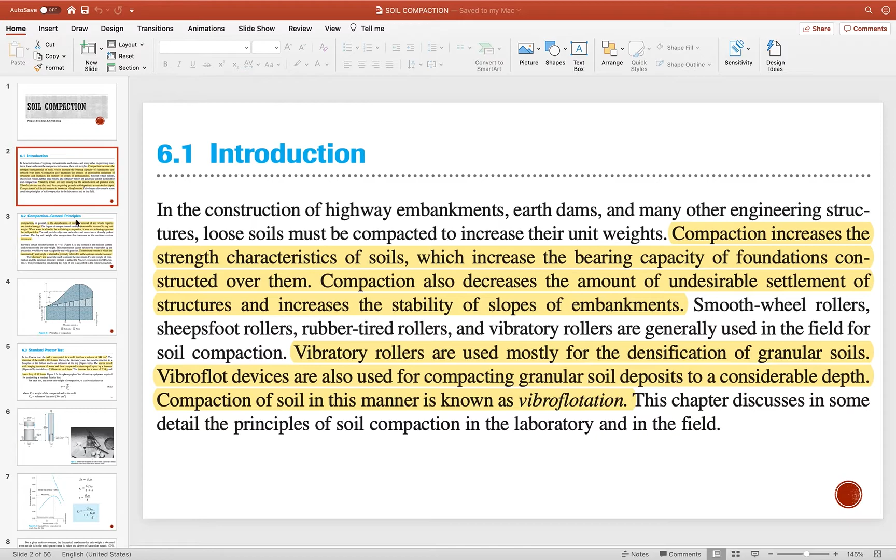Okay? So, vibratory rollers are used mostly for the densification of granular soils. Vibroflot devices are also used for compacting granular soil deposits to a considerable depth. Compaction of soil in this manner is known as vibroflotation. Okay? So, for this chapter, we're going to discuss more in depth yung soil compaction natin. By the way, this is chapter 6 from the book of Braja M. Das.

Okay? So, compaction, in general, is the densification of soil by removal of air, which requires mechanical energy. So, we are going to densify our soil by removing the air. Pinabawasan natin yung void natin. Okay? And it is measured in terms of its dry unit weight. When water is added to the soil during compaction, it acts as a softening agent on soil particles.

So the importance of adding water is it will help us determine the optimum unit weight of our soil. Okay? So nalalaman natin yon. Mamaya, i-discuss natin yan. So, the moisture content at which the maximum dry unit weight is attained is generally referred to as the optimum moisture content.

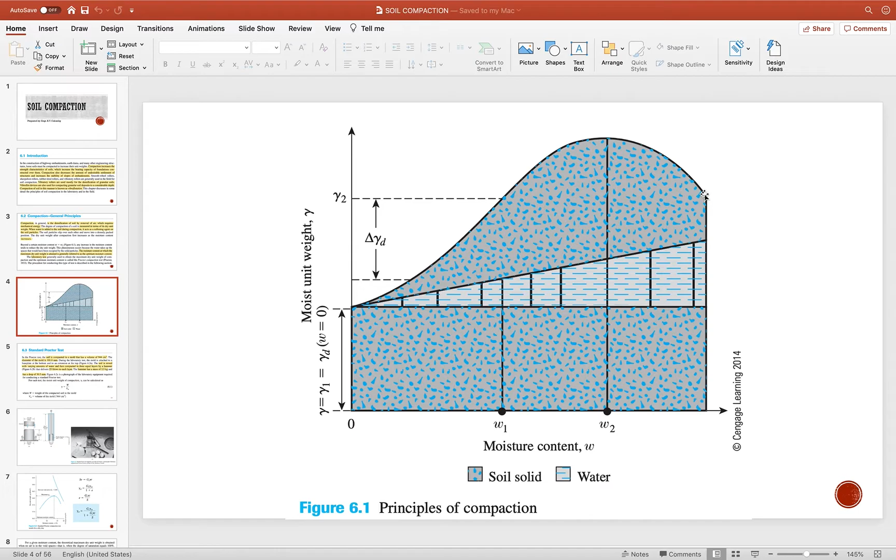So, what are the tests? So, we have the standard Proctor test. In the Proctor test, the soil is compacted in a mold that has a volume of 944 cubic centimeters with a diameter of 101.6. The soil is mixed with varying amounts of water, then compacted in 3 equal layers by a hammer with 25 blows each layer.

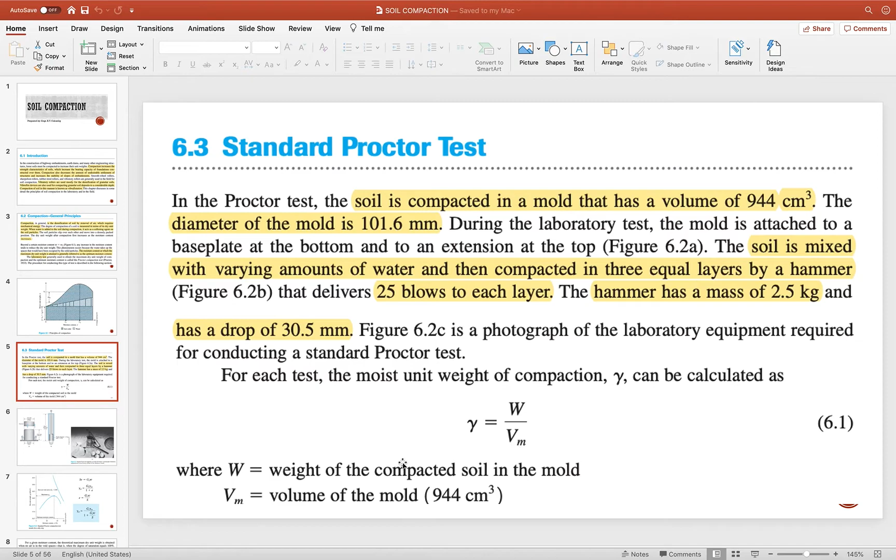The hammer has a mass of 2.5 kilograms and it has a drop of 30.5 millimeters. So therefore, the unit weight is equivalent to the weight divided by the volume of the mold. Okay? So makukuha natin. So ito yung ating apparatus.

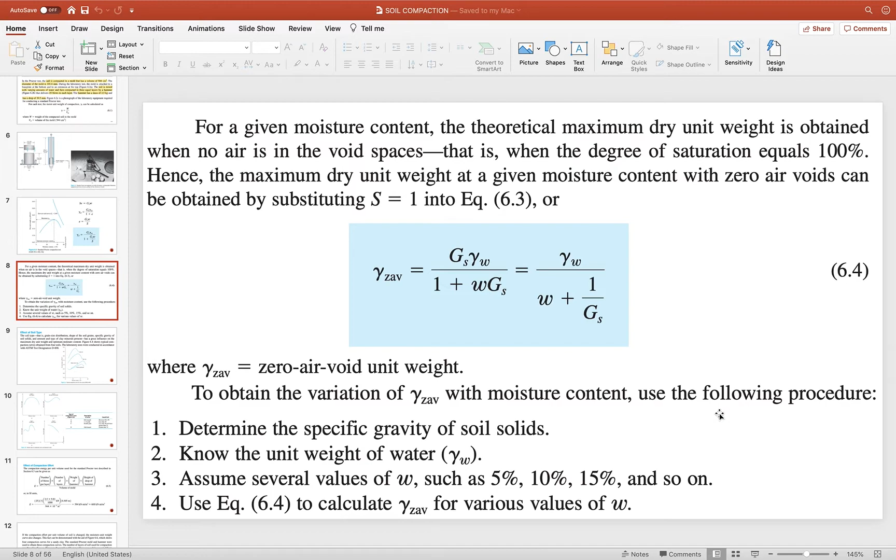Okay, so how are we going to do that? Determine the specific gravity of the soil solids. Number 2, know the unit weight of water. Of course, we know that, 9.81 kilonewton per cubic meter. Assume several values such as 5, 10, 15%, and so on. Okay? Makikita naman natin di ba? Like here sa graph na to, 5, 10, 15. So, sa 15, nagkaroon na ng decrease. Then, sa 18, of course, malamang it will be a decrease.

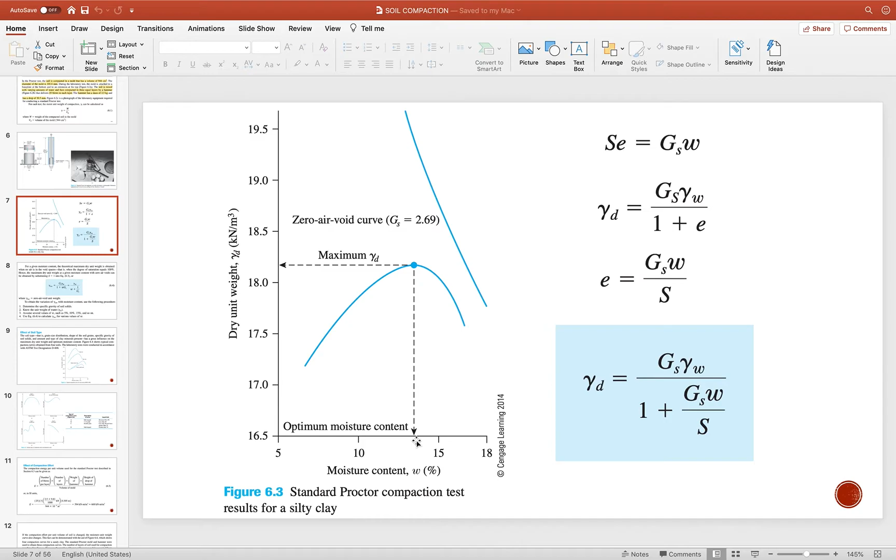Then, yung mga points, ipagko-connect natin ng smooth curve. Then, yung maximum, project it horizontally, project it vertically. Then, makukuha natin yung maximum dry unit weight, makukuha natin yung optimum moisture content. So, the soil type, the grain size distribution, shape of soil grains, specific gravity of soil solids, and amount and type of clay minerals present. These factors have great influence on the maximum dry unit weight and optimum moisture content.

Okay, so these are outputs of some laboratory tests that were conducted with respect to ASTM designation D698. So, sandy silt, more or less ganito ang itsura ng curve. So, silty clay, ganito ang itsura ng curve. We have highly plastic clay. Ito naman itsura ng curve natin. Then, we have a poorly graded sand.

So, for a poorly graded sand, of course, we can expect na if we're going to densify that, medyo hindi ganun kataas yung makukuha natin because it is granular. In terms of shape kasi medyo angular yung shape ng sand. So, maraming voids talaga dyan. Okay?

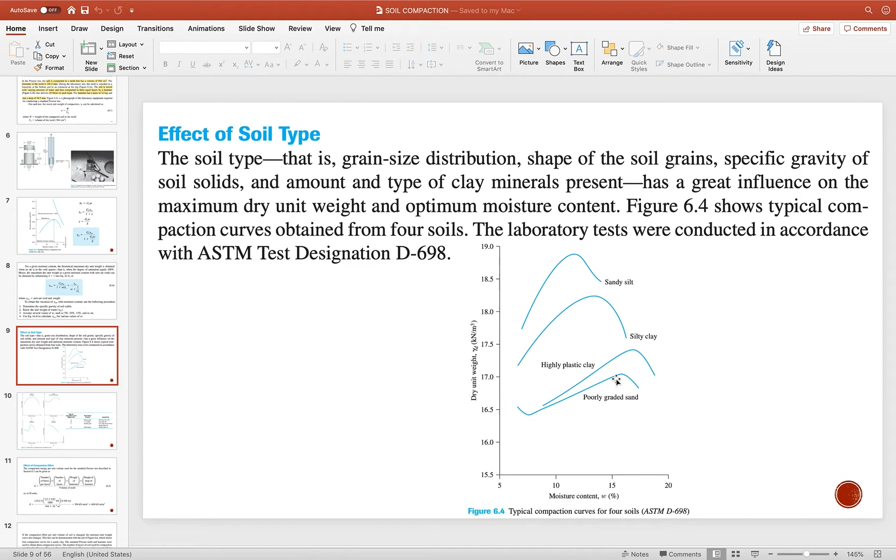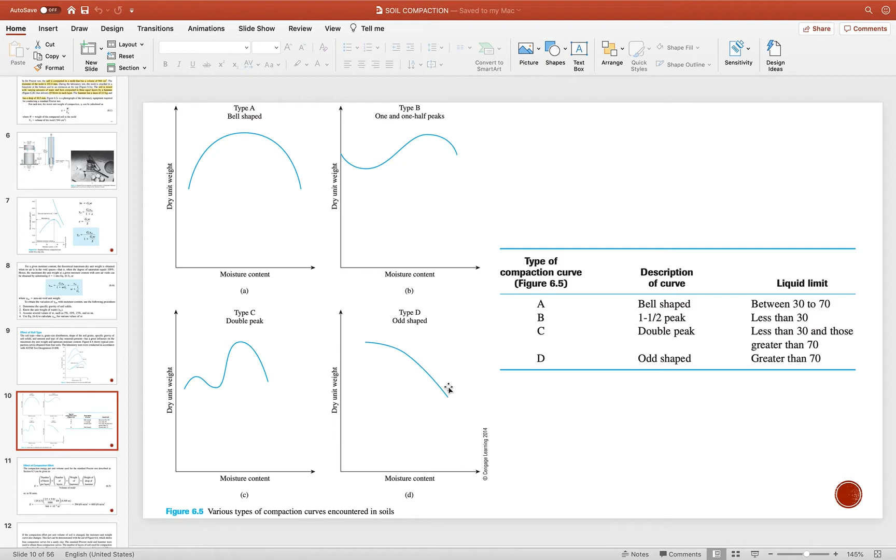So, we have here the bell shape type. We have 1.5 peak. We have the double peak, so dalawang beses siya nag-peak. Then we had the odd shape. So, the liquid limit for this type of curve, ito yung mga yon. 30 to 70, less than 30, less than 30, and those greater than 70. So, ito yung less than 30, greater than 70. Then, the odd shape, which is greater than 70 for the liquid limit.

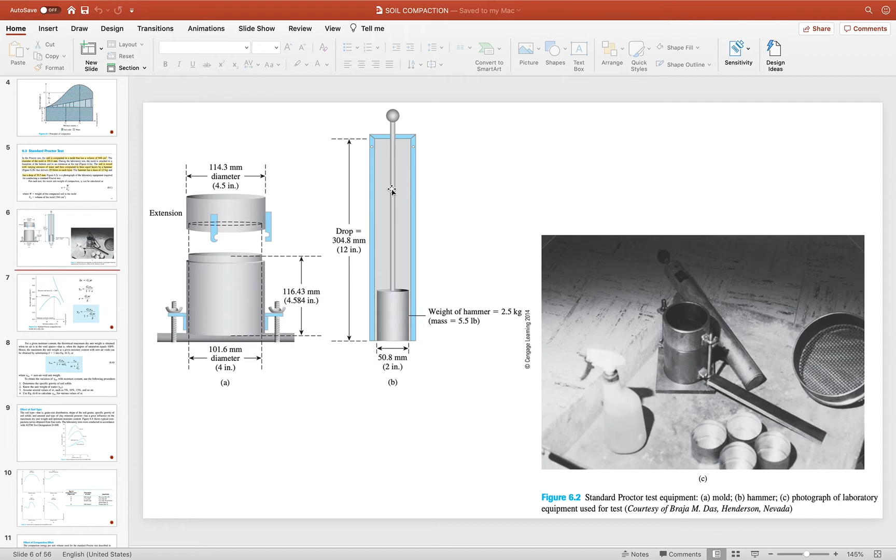Okay? So, effect of compaction effort. So, the compaction energy per unit volume used for the standard Proctor test described in section 6.3 can be given as number of blows. Kung ilang beses siyang hinulog, which is 25. Tama? Then, number of layers, we have 3. Weight of the hammer. Anong weight ng hammer natin? We have 2.5 kilogram or 5.5 pounds. Height of drop of the hammer, we have 304.8 mm or 12 inch.

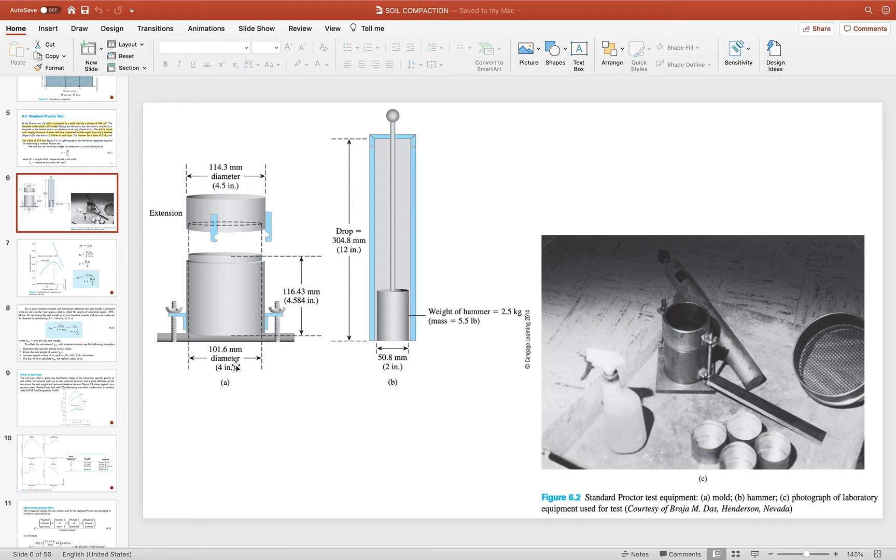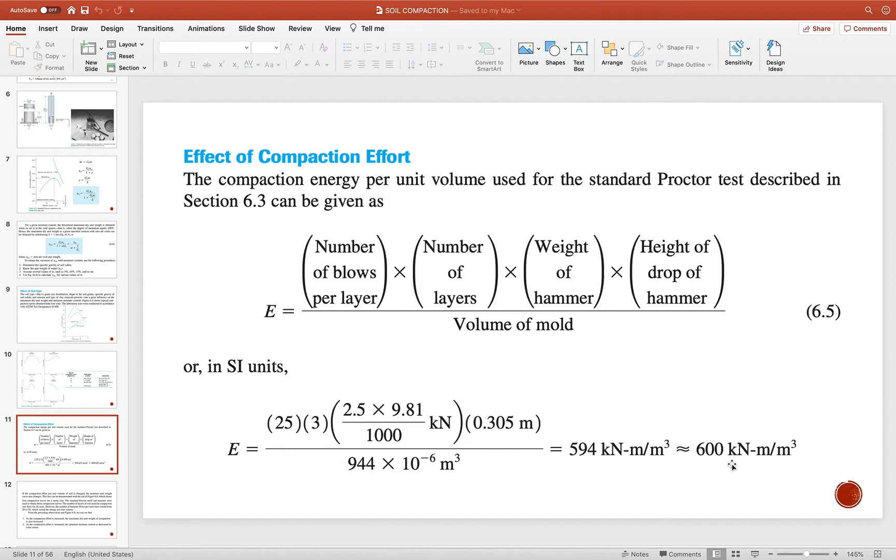Then, the volume of the mold, actually standard na tong mga to, no? It's already given. The diameter is 101.6 mm or 4 inch. Therefore, it will give us 944 cubic centimeters. Okay? So, it is equivalent to 594 kilonewton meter per cubic meter. Yan yung energy natin for the test. Okay? Or it is almost equal to 600 kilonewton meter per cubic meter.

Okay? If the compaction effort per unit volume of soil is changed, the moisture unit weight curve also changes. This fact can be demonstrated with the aid of figure 6.6, which shows 4 compaction curves for a sandy clay. The standard Proctor mold and hammer were used to obtain the compaction curves.

So dito ang ginawa, we tried different numbers of blows. So, it is between 20 to 50. So, kung titignan mo, 20 blows lang per layer, ang maximum na pwede mong makuha na unit weight is nandito lang.

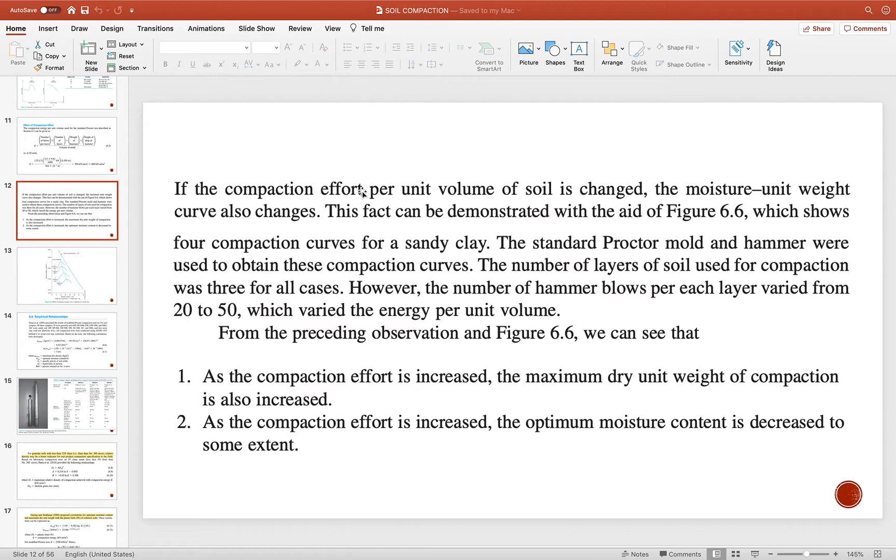It increased, became 25, then increased further. It increased from 25 blows to 30 blows, then increased again to 50 blows per layer. So therefore, if there is an increase in the number of blows, there is a change. If there is a change in the effort for compaction, the moisture and unit weight also change.

That changes. So this is our zero air void curve. Here you have the saturation, which should be equal to 100.

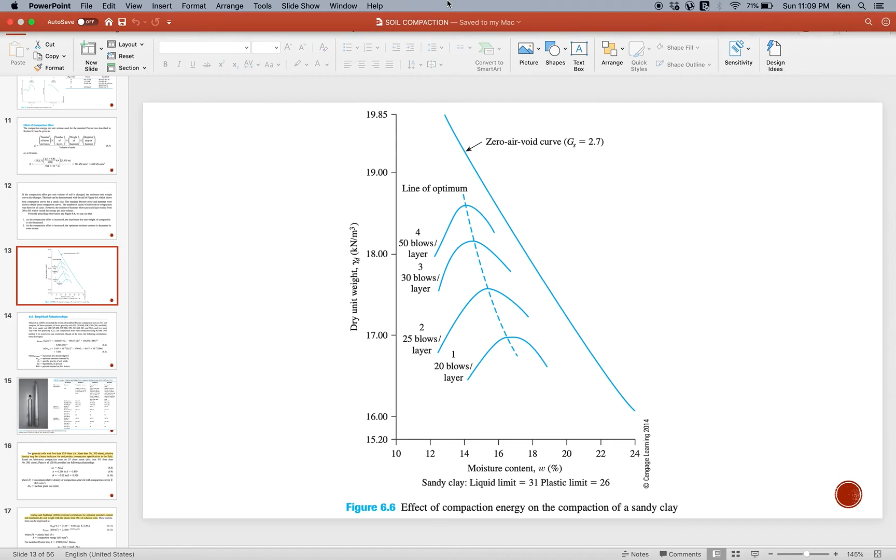So, empirical relationships. Omar et al. presented the results of modified Proctor compaction tests on 311 soil samples. Of these, 45 were gravelly soil, 264 were sandy soil, and 2 were clay with low plasticity. All compaction tests were conducted using ASTM 1557, method C, to avoid oversized correction.

Based on the tests, the following correlation was developed. We will be using this formula later, and I'll explain whether we're going to use this or not in the problem. Since your home activity will be given at home, I don't need to explicitly say it's open notes—it is indirectly implied.

So, the maximum dry density in kilogram per cubic meter is equivalent to 4,804,574 times the specific gravity minus 195.55 times the liquid limit squared, plus 156,971 times R number 4 raised to 0.5, minus 9,527,830 raised to that quantity raised to 0.5.

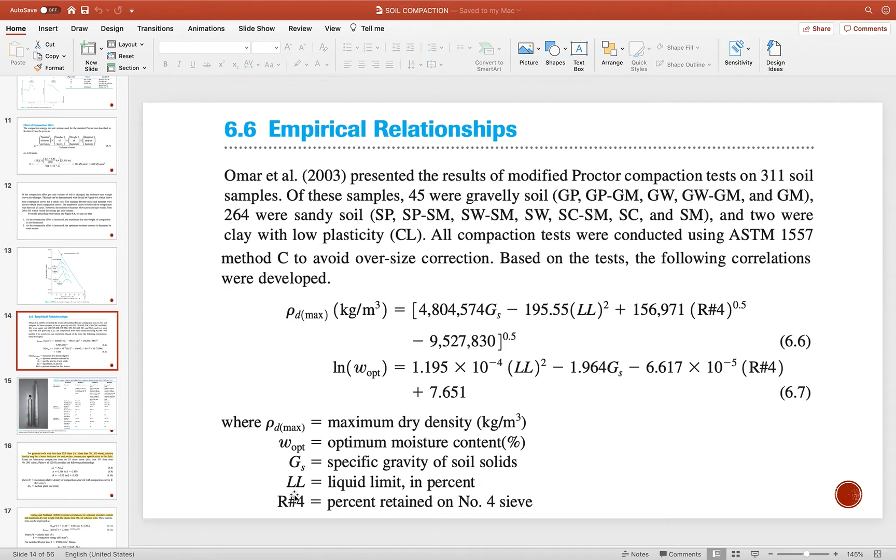Ln for the optimum moisture content: 1.195 times 10 raised to negative 4 times the liquid limit squared, minus 1.964 times the specific gravity, minus 6.617 times 10 raised to negative 5 times R number 4, plus 7.651. R number 4 is the percent retained on the number 4 sieve—more or less, this represents the amount of gravel.

So this is for the standard Proctor hammer and the modified Proctor hammer. On the left side we have the standard, and on the right side is the modified Proctor hammer. So we have here a comparison between the standard Proctor test and the modified Proctor test.

For the standard Proctor test, we are given values for method A, method B, and method C. Method A: use 20% or less by weight material retained on number 4, and so on. Method B: passing 9.5 mm sieve, used if more than 20% of the weight of material is retained on number 4, or 20% or less by weight material is retained on 9.5 mm sieve. So it's in between.

Method C: passing 19 mm sieve, used if more than 20% by weight of material is retained on 9.5 mm sieve and less than 30% by weight of material is retained on 19 mm sieve. So the number of blows differs for each method: method A is 25, method B is 25, and method C is 56.

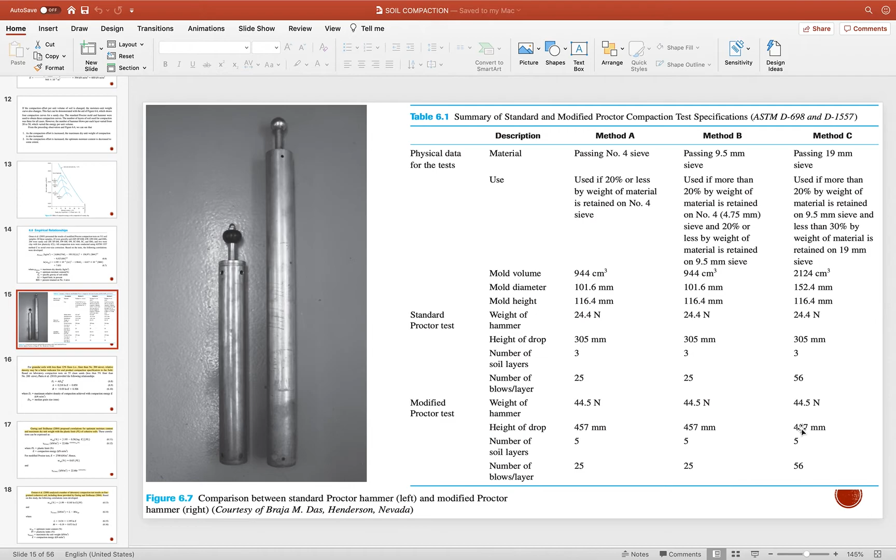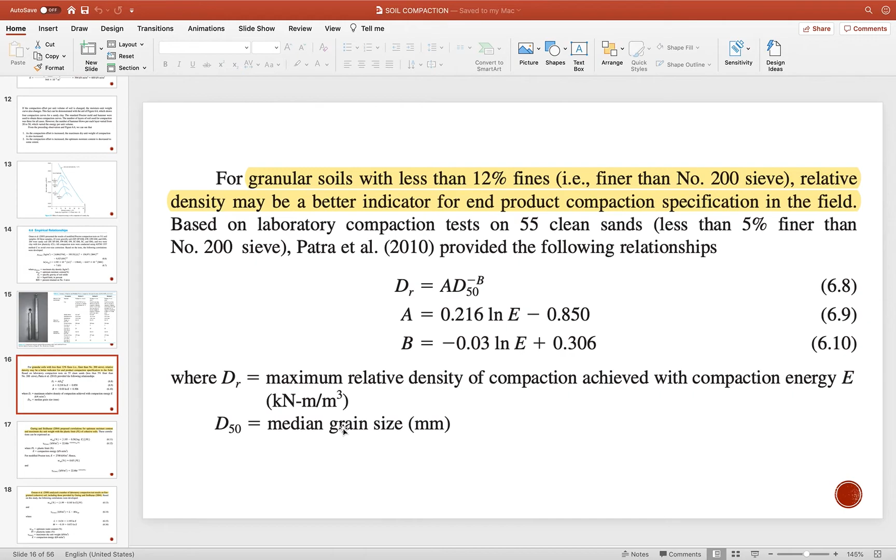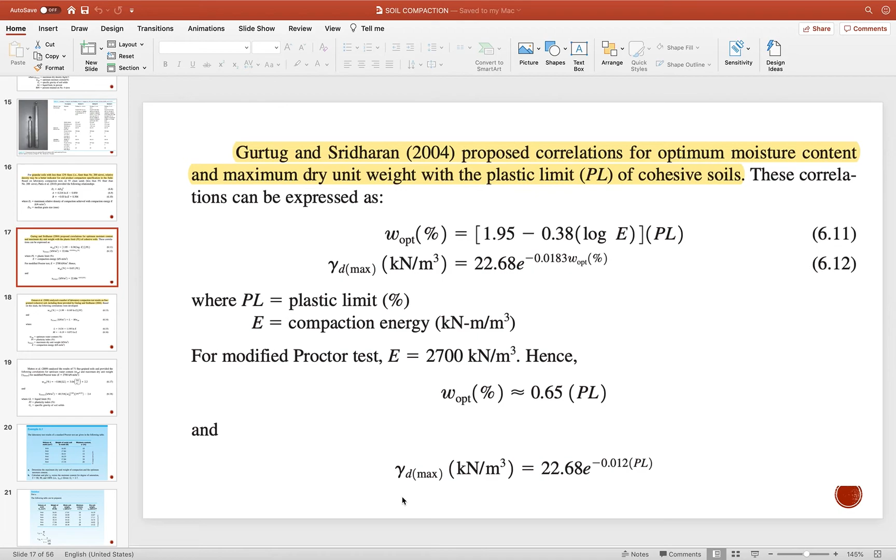Gurtug and Sridharan proposed correlations for optimum moisture content and maximum dry unit weight with plastic limit of cohesive soils. So this is their equation. For the modified Proctor test, E is 2,700 kilonewton per cubic meter. Therefore, the optimum moisture content is approximately 0.65 times the plastic limit, and this is your maximum dry unit weight.

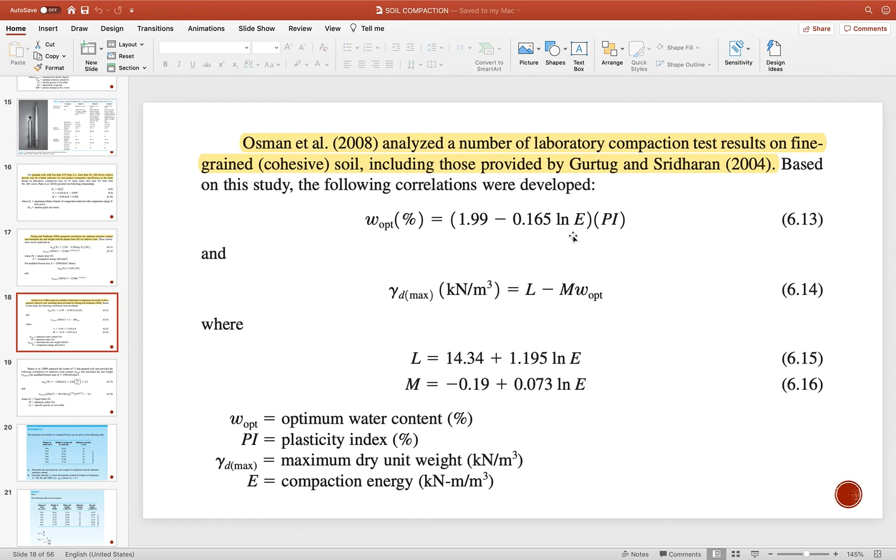Then Osman et al. in 2008 analyzed a number of laboratory compaction test results of fine-grained cohesive soils, including those provided by Gurtug and Sridharan in 2004. Based on his study, the following correlations were developed: for the optimum moisture content, this is the formula, and for the maximum dry unit weight, this is the formula.

If you think geotechnical engineering is just a small part of the civil engineering field, just from this soil testing alone you can see you're wrong—it is much broader. So if you finish your degree, I think it's better if you consider geotechnical engineering. Geotechnical engineering, water resources engineering, and transportation engineering are the less-taken paths by common civil engineering graduates.

So this is part 1 of the soil compaction video lecture. Stay tuned for part 2.